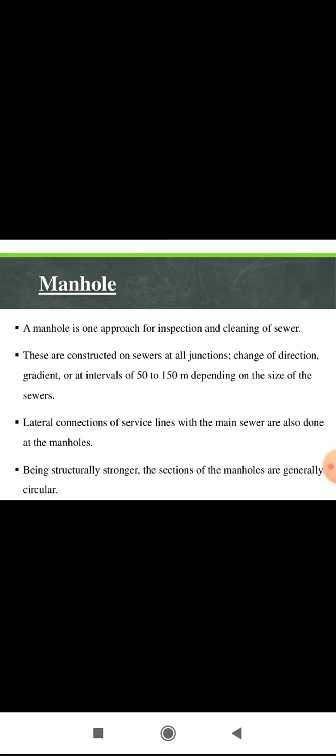The top of the manhole are provided with CI (cast iron) covers of heavy duty, medium duty, or light duty according to the location of the manhole.

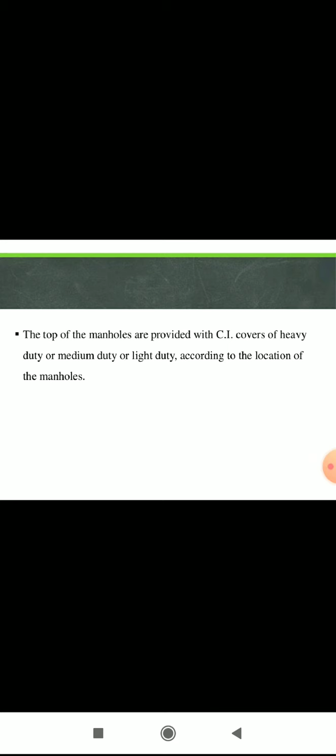Second is drop manhole. When a branch sewer enters a manhole at a level more than 500 to 600 mm above the main sewer, the sewage is brought down into the sewer through a pipe and carried down from the branch sewer to the bottom of the manhole.

The sewage is not allowed to drop directly into the manhole from a height, as it would otherwise splash in the manhole, causing unwanted deposition, and due to dropping from a height, heat would be generated, accelerating decomposition of the sludge in the manhole, which is not desired.

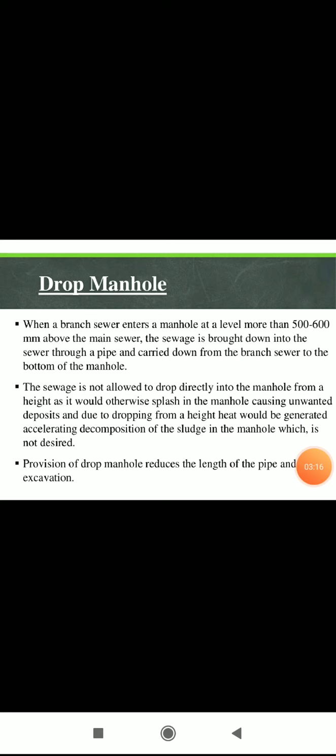Provision of drop manhole reduces the length of the pipe and cost of excavation.

Second is gully pit and trap. Provision of gully trap is essential in the house drainage system to cut off the house from the direct communication with the drain. The barrier is caused by the water seal of the trap, which should be at least 75 mm.

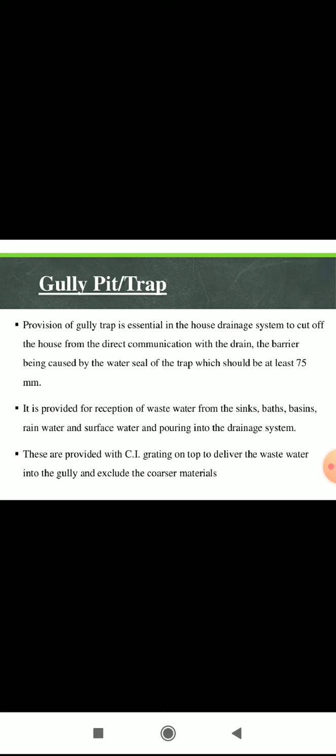It is provided for reception of wastewater from the sink, bath, basin, rainwater and surface water, pouring into the drainage system. These are provided with cast iron grating on top to deliver the wastewater into the gully and exclude the coarser material. Intercepting trap and master trap.

It is also called disconnecting trap. It disconnects the house drains from the street sewer and is placed in a small chamber between the lower end of the house drain and the street sewer, with the primary object of preventing foul gas and pathogenic bacteria of the public sewer from entering the house.

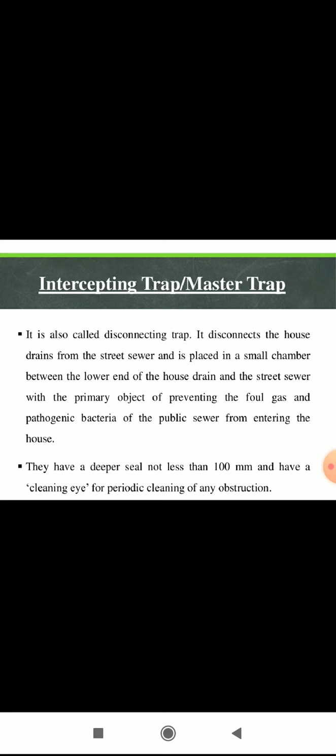They have a deeper seal, not less than 100 mm, and have a cleaning eye for periodic cleaning of any obstruction. Septic tank - we have already discussed septic tank very broadly, so we will not discuss it here.

Soak pit - these are masonry wells of required diameter and about 3000 mm in depth from the ground level. The well is built in dry brickwork for allowing water from the well to seep into the soil. The top 1 meter is lined with cement mortar.

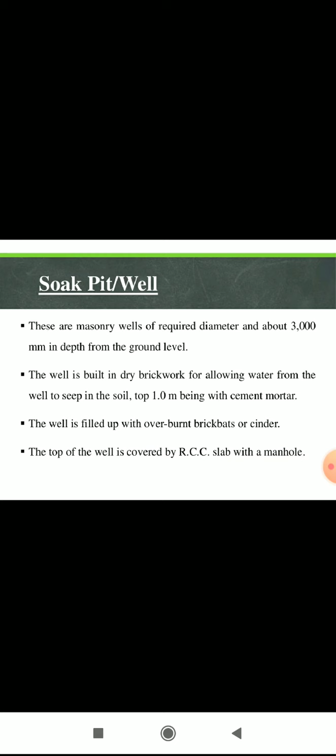The well is filled up with overburnt brickbats or cinder. The top of the well is covered by RCC slab with manhole. The effluent from the septic tank is diverted into the well through SW pipe, which trickles through the brickbat filling.

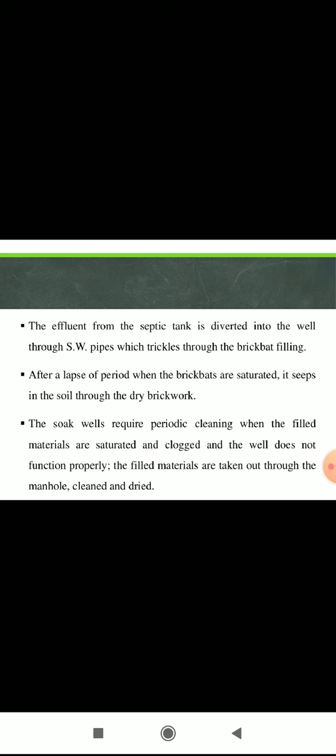After a lapse of time, when the brickbat are saturated, it seeps into the soil through the dry brickwork. The soak well requires periodic cleaning when the filled materials are saturated and clogged and the well does not function properly. The filled material are taken out through the manhole, cleaned and dried.

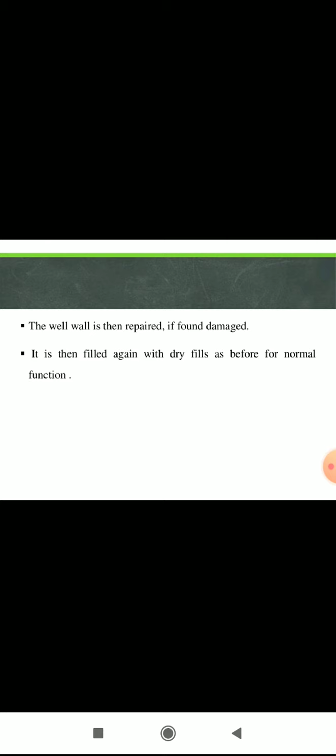The well wall is then repaired if found damaged. It is then filled again with dry fills as before for normal function. So, cost effective sanitation system is not in our syllabus.

Holding tank is in our syllabus; yes, these are underground masonry, preferably RCC tank, where effluent is collected. The tanks are required to be watertight. The effluent from a definite area is collected through a sewerage system.

The effluent is not allowed to be digested in the tank but is pumped into an effluent carrying tanker and thrown in a sewerage system for final disposal, or is carried to a sewage treatment plant or disposed of to an area meant for the purpose.

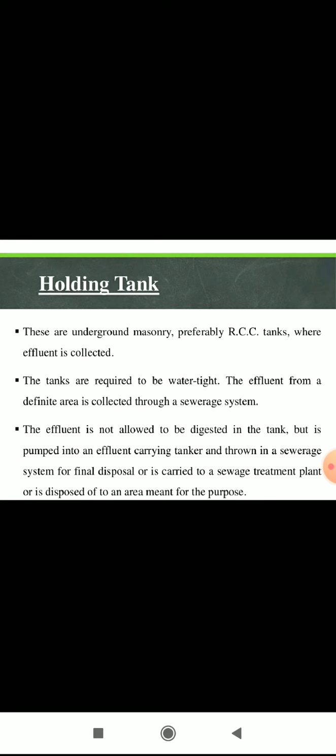This is definitely a safe method as it leaves very little scope for pollution or contamination, but it requires a considerable size of holding tank and a whole set of machineries for lifting the effluent from the underground tank to the tanker and transport to the disposal site.

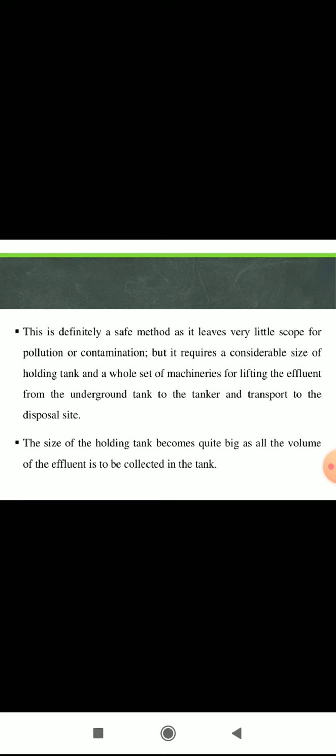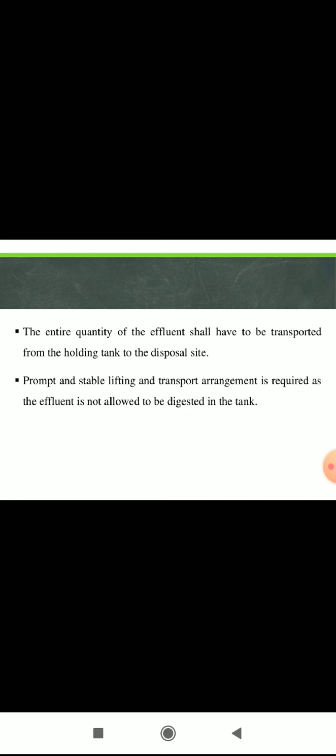The size of the holding tank becomes quite big as all the volume of the effluent is to be collected in the tank. The entire quantity of the effluent shall have to be transported from the holding tank to the disposal site. Prompt and stable lifting and transport arrangement is required as the effluent is not allowed to be digested in the tank.

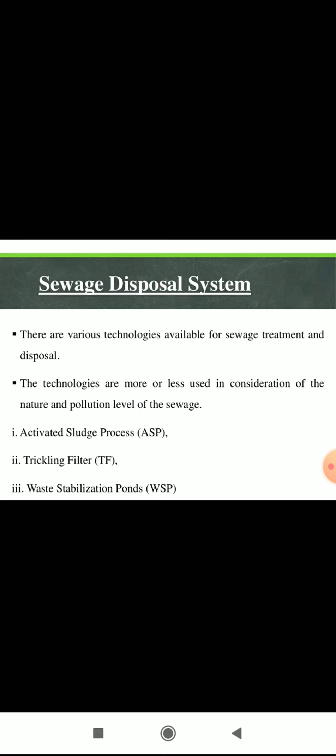Yes, we can cover this topic also. There are various technologies available for sewage treatment and disposal. The technologies are more or less used in consideration of the nature and pollution level. First one is activated sludge process (ASP), trickling filter, and waste stabilization pond.

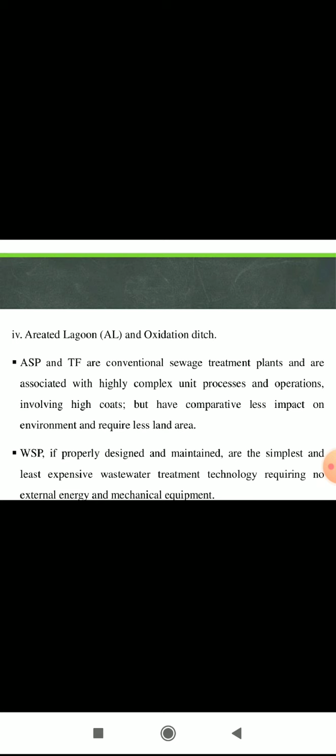Aerated lagoon and oxidation ditch. ASP and TF, activated sludge process and trickling filter, are conventional sewage treatment plants and are associated with highly complex unit processes and operations involving high costs, but have comparatively less impact on environment and require less land area. WSP, if properly designed and maintained, is the simplest and least expensive wastewater treatment technology requiring no external energy and mechanical equipment. Okay, we will skip the ASP and lagoons.

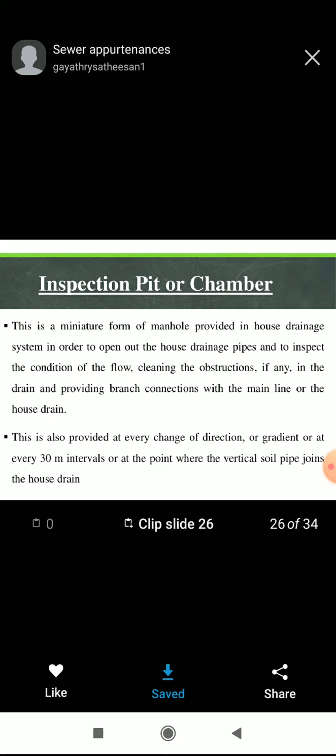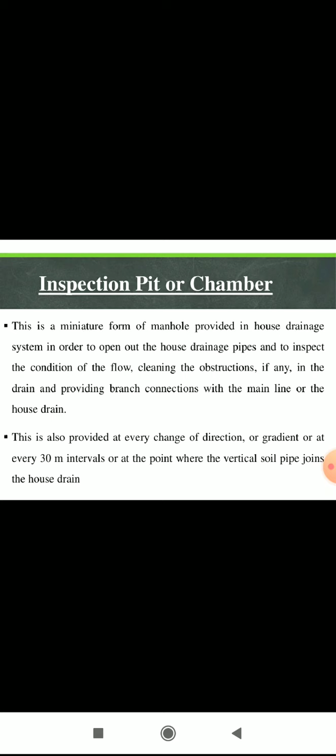Next is inspection pit or chamber. This is a miniature form of manhole provided in house drainage system in order to open out the house drainage pipes and to inspect the condition of the flow, cleaning the obstructions if any in the drain, and providing branch connections with the main line or the house drain. This is also provided at every change of direction or gradient, or at every 30-meter interval, or at the point where the vertical soil pipe joins the house drain.

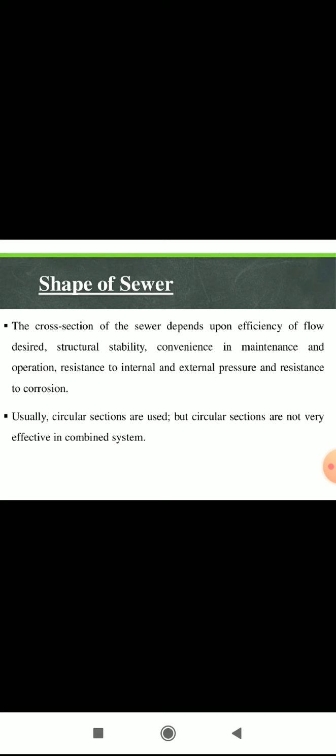Shape of sewer. The cross section of the sewer depends upon efficiency of flow desired, structural stability, convenience in maintenance and operation, resistance to internal and external pressure, and resistance to corrosion. Usually circular sections are used, but circular sections are not very effective in combined systems. The flow in dry weather conditions becomes negligible compared to the combined flow during rainy season, causing deposition of solids due to low velocity of flow.

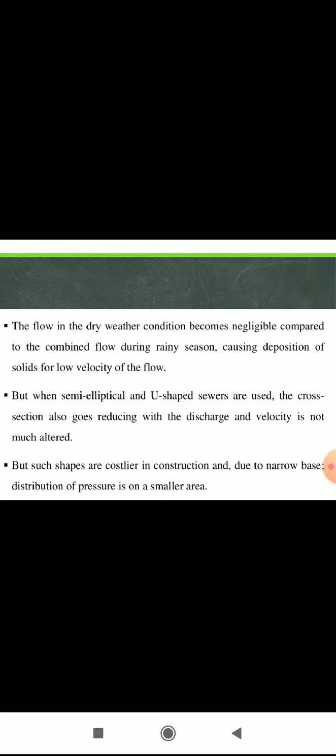But when semi-elliptical or U-shaped sewers are used, the cross section also goes reducing with the discharge and velocity is not much altered. But such shapes are costlier in construction, and due to narrow base, distribution of pressure is on a smaller area. Also, if proper shape is not provided, self-cleansing velocity will not be obtained, which is essential for efficient functioning of the sewer.

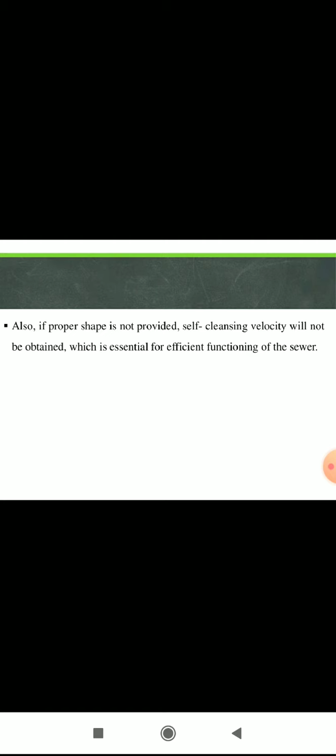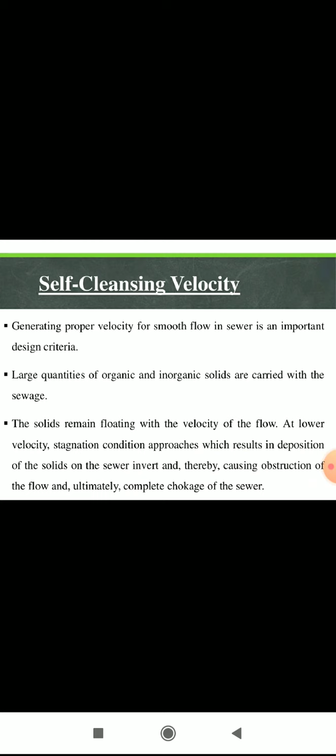Generating proper velocity for smooth flow in sewer is an important design criteria. Large quantities of organic and inorganic solids are carried with the sewage. The solid remains floating with the velocity of the flow at lower velocities. Stagnation condition approaches, which results in deposition of the solid on the sewer invert, thereby causing obstruction of the flow and ultimately complete choking of the sewer.

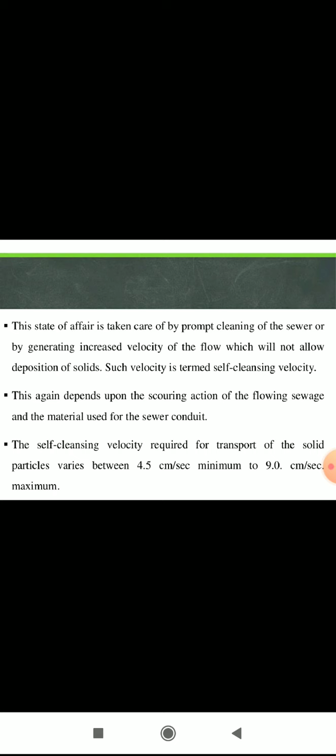This state of affairs is taken care of by prompt cleaning of the sewer or by generating increased velocity of the flow which will not allow deposition of solid. Such velocity is termed self-cleansing velocity. This again depends upon the scouring action of the flowing sewage and the material used for the sewer conduit. The self-cleansing velocity required for transport of solid particles varies between 4.5 cm per second minimum to 9 cm per second maximum.